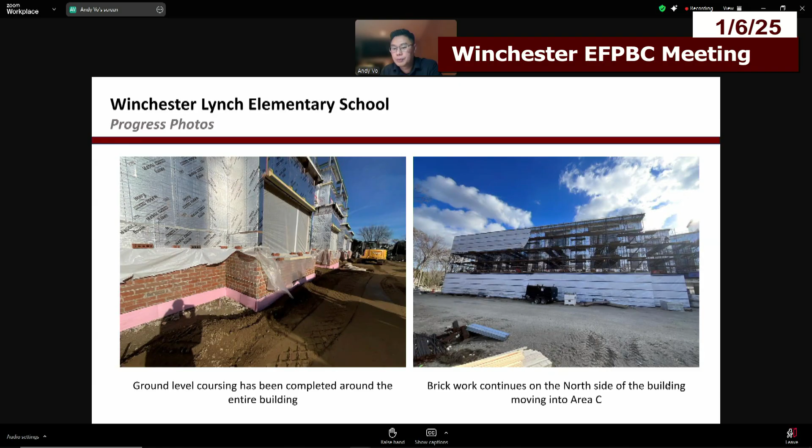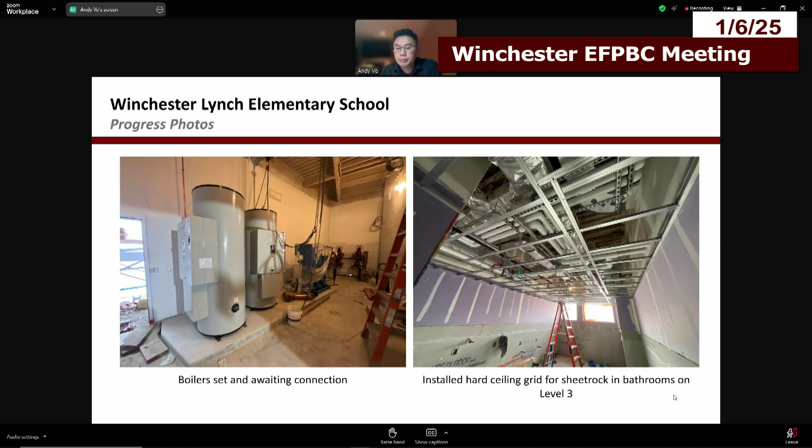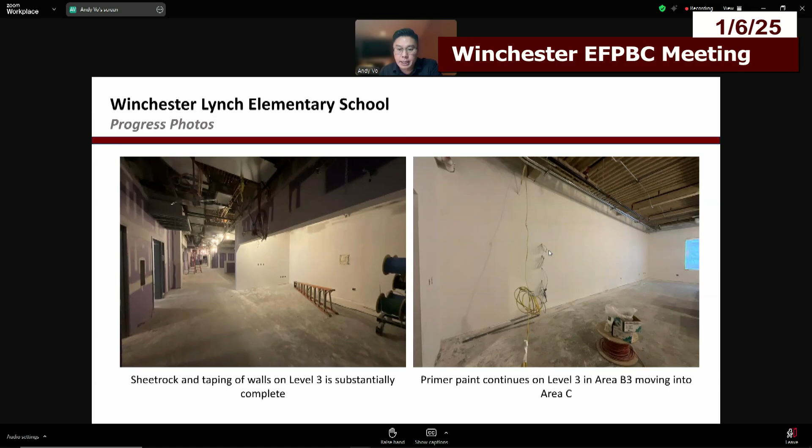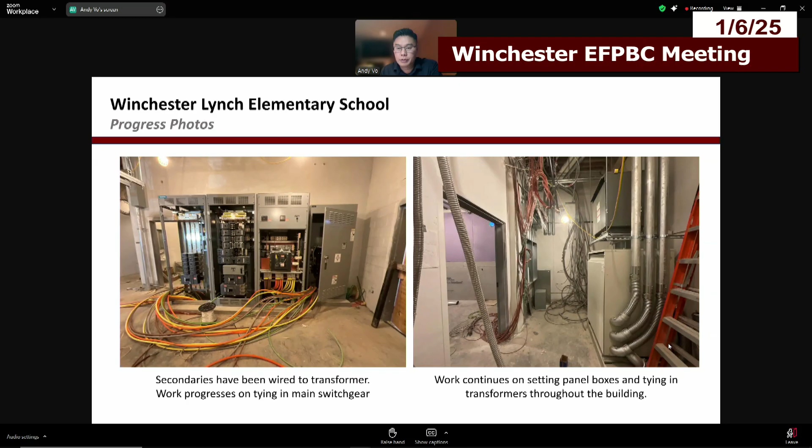The switchgear. So as I mentioned, they already started the secondary, waiting to hear back from Eversource to help us get the permanent power from the pole. Setting panel boxes, progress here with tying into the transformer for the building. The elevator, as I mentioned, is in place. So we're just waiting for permanent power for them to continue on with their work with the balancing of the elevator. Here's more pictures of drywall, and then they're doing the control work, the wiring.

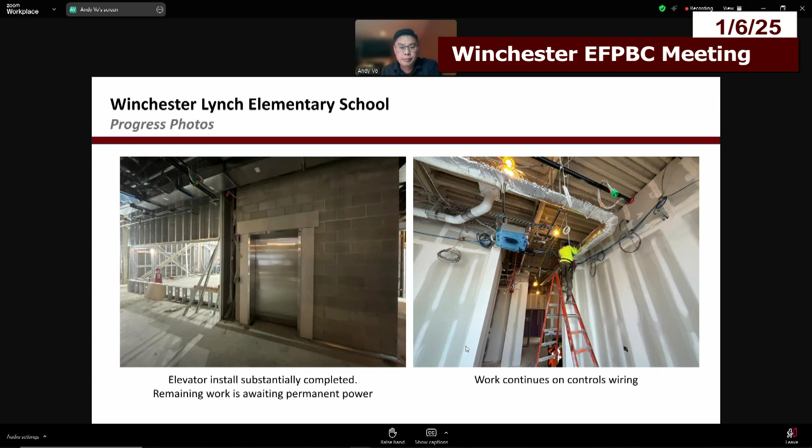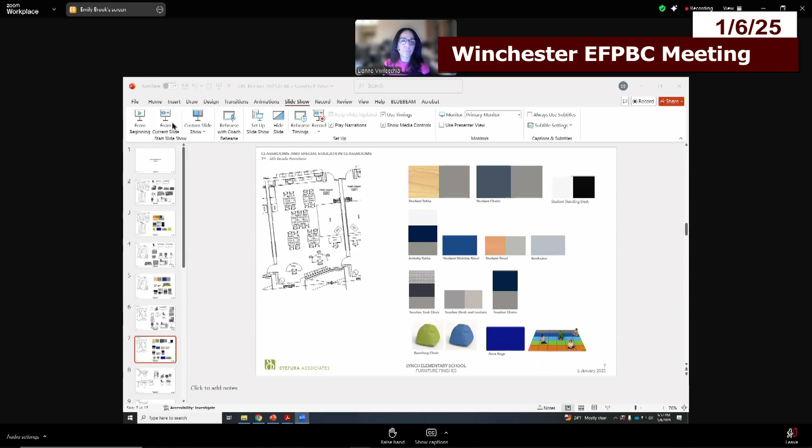The area rugs, yeah, for the younger grades, it's the designated spots, and then I believe grades 3 through 5 have a solid color area rug. Correct.

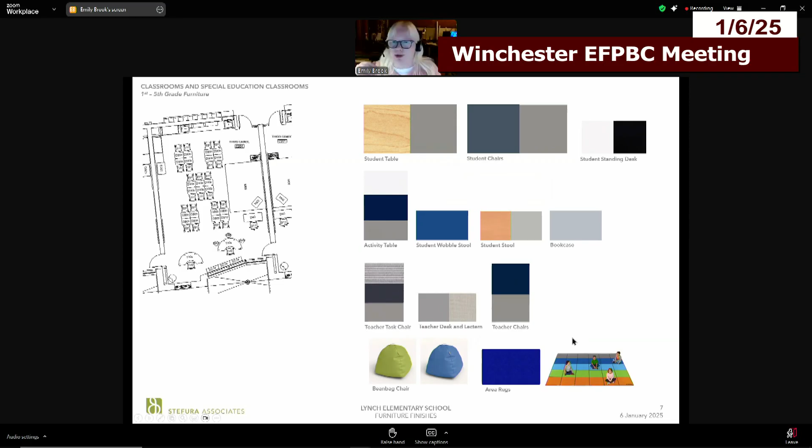Sorry, I couldn't unmute myself. It's okay. Okay. All right.

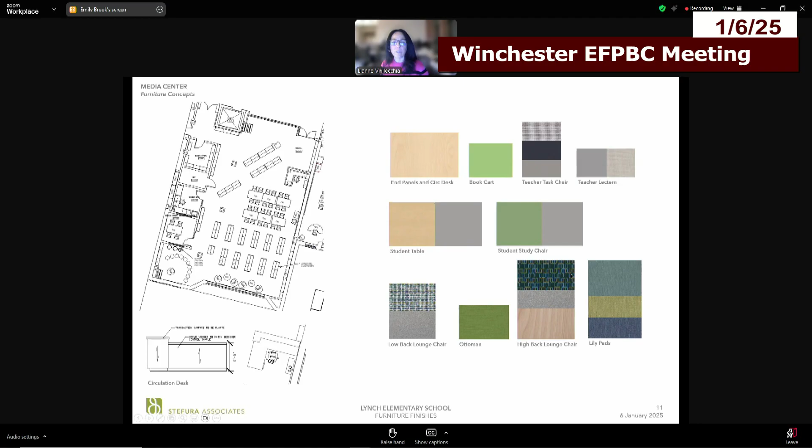And the 2 fabrics you can see for the low back lounge chair, it's a fully upholstered chair with a silver frame. And then the high back chair has that fun geometric pattern. And there's only actually one of those over in the reading area. Okay.

Art and STEAM consist of the heavy duty tables on lockable casters. These are at seated height with the standard student chair or a perch stool. The teacher, in addition to having the typical teacher desk and chair, also has a demo table. And depending on which class it is, a variety of mobile storage units with individual bins that can be pulled out, drying racks, utility storage shelving for the closets, and a mobile marker board.

So in here, the student tables have the epoxy tabletop surface, which is a request. And to add some color into these spaces, we're doing the bright blue metal on the legs of those tables. And then the stool and the student chairs are consistent with general classrooms, as is all the teacher storage and furniture.

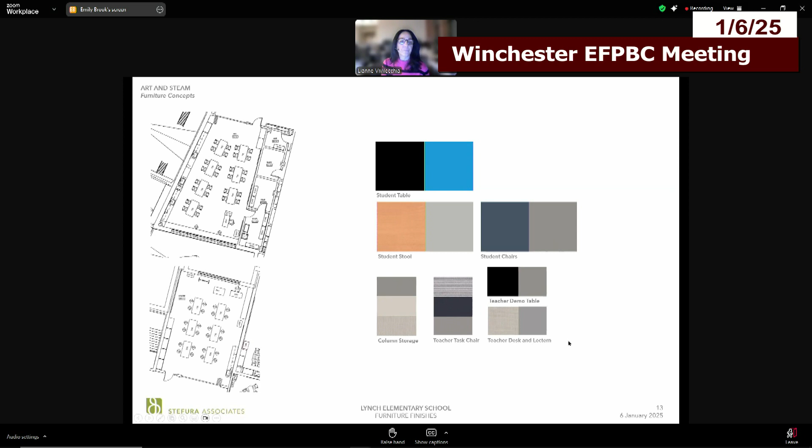For the cafeteria, the layout is a combination of round and elliptical tables. They are all attached to button seats, which was a request from the school. And in addition to those, we have a series of plastic stack chairs. That's the Herman Miller Pronto. There's an amount of these within the seating to meet our ADA requirement. And then the other furniture you see up top is for the kitchen office, so the task chair and storage.

So finishes within the cafeteria: the tables' base is chrome, the button seats are the bright blue, the table surface is a variegated patterned laminate, which is kind of a light gray with light tone finish with a gray edge to it. Stack chair is the gray with the silver frame.

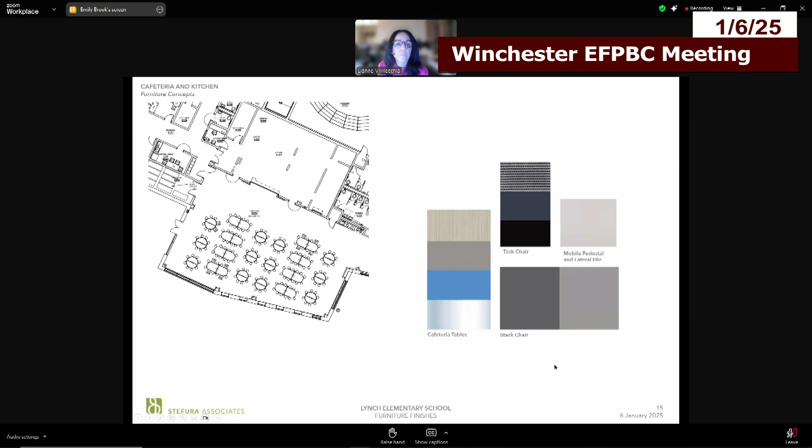And then lastly, the administration offices. We have either L-shaped desks or just single pedestal desks in the offices. All have lockable storage depending on need. There's additional bookcases or file cabinets. The 9-to-5 Neo was the selected task chair for all the administration offices, and the Herman Miller Verus was the selected guest chair in all the offices.

A few wobble stools, excuse me, are used in offices where children come in and meet, guidance spaces like that. In the conference table you see below, the large conference room will have a separate storage credenza, and some of the offices have a separate small meeting table.

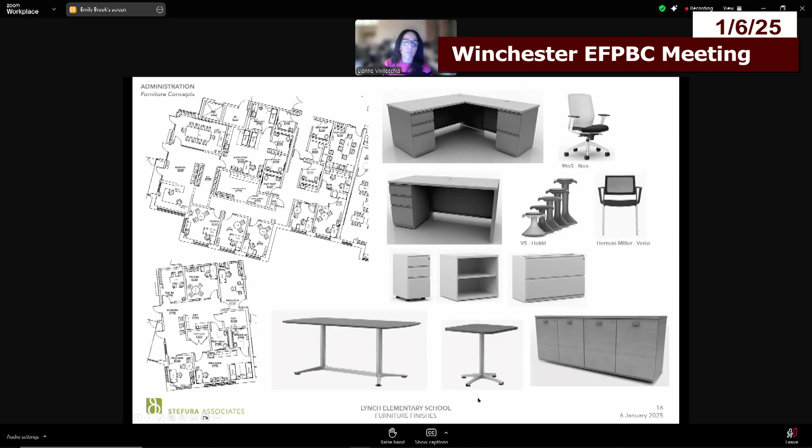And the finishes for the offices, again, keeping the warm maple tone for all of the desk surfaces with light gray storage. Task chair has a mesh back with the blue vinyl upholstered seat and a black frame. And the guest chairs, again, have a mesh back with a blue upholstery for the seat that you see there in the middle. And the wobble stools will be the same blue that's used upstairs. I believe that's the overview. So if there's any questions, that's everything.

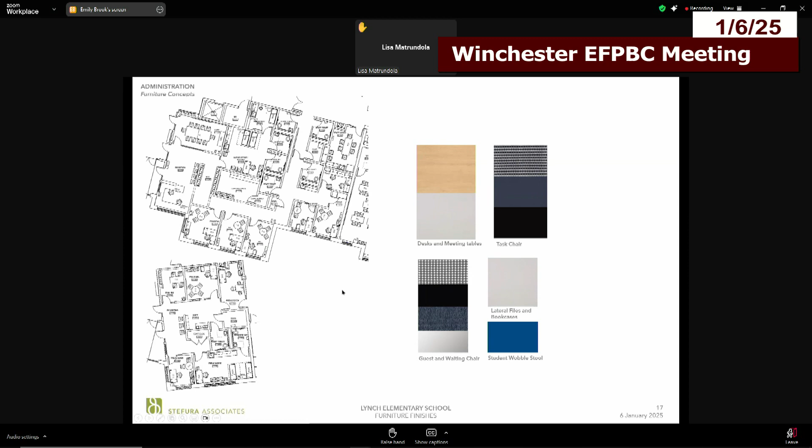All right, Lisa, you're first up. Okay, it looks good. However, I'm kind of concerned about that wavy chair, I don't know the exact name of that chair. The Intellect Wave, yeah. Granted it's cool looking, but I'm concerned about the safety of it. I don't think it's very practical, but I also think, what if a student had, say, some type of spinal thing? I just don't think it's very safe. I know it's cool looking, but I don't think it's very ergonomically correct. That's the only one I'm really concerned about.

Well, this is a student chair that's used very often in a lot of public education, and they did have an opportunity to sit in it and compare it to the four-legged chairs. We are using it in the pre-K and K grades. It is just pre-K. Sorry, yeah, it is stable, and I think what they like about it is that it has a little bit more flex and movement to it because of the cantilever. So if kids are fidgety, there's a little play in it. It's really minimal movement, just a little bit.

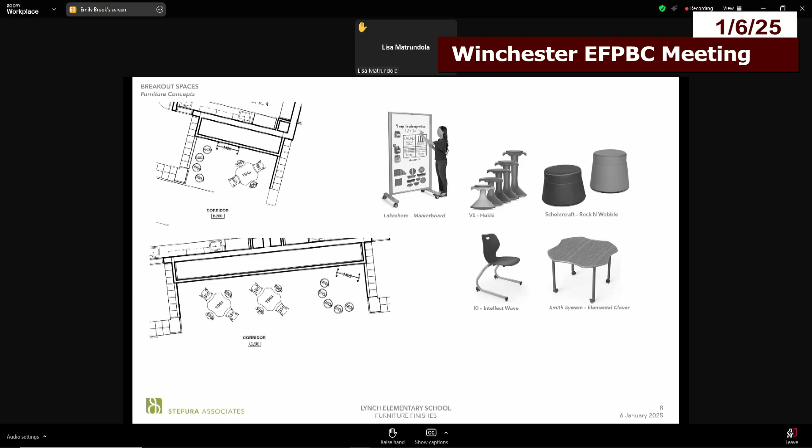You're not wrong. Yeah, it's tough in a photo sometimes. I think of a young child that possibly could have scoliosis at that age. You know what I'm saying? And that certainly wouldn't be the chair that I would recommend. I don't know, I'm just thinking out of the box. So, okay. But the rest of it looks okay.

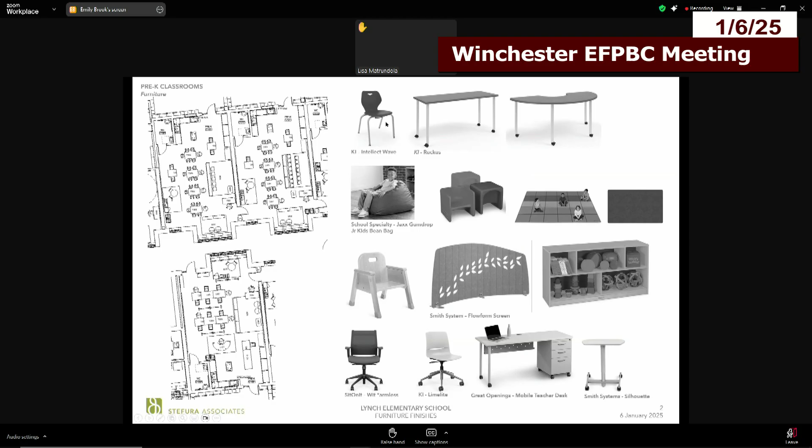Okay. I really don't know a lot about scoliosis, but it is the exact same seat frame as the 4-leg version. Just the legs are different. I don't know if that helps. I don't know what the needs for something like scoliosis would be. Yeah, I think it's more the back and the support and just the chair being more straight like that. Yeah, the seat actually is the same. It's just the frame. Okay.

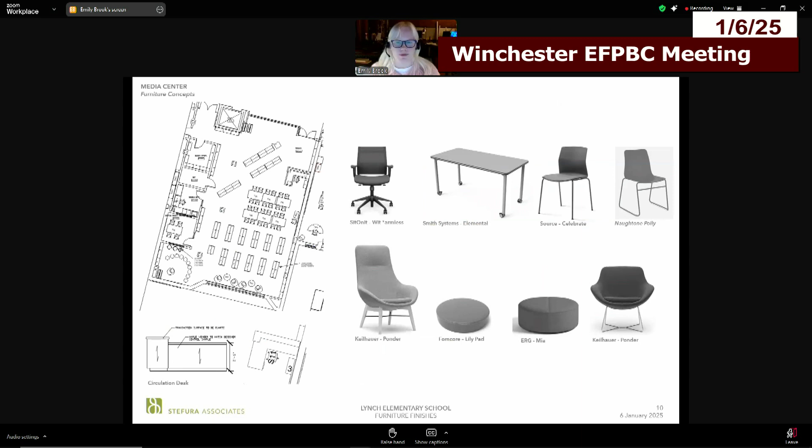Okay, it's nice though. That was my only concern with it. Oh, thank you. That's a good concern. Chris? Yeah, I had several questions. Are the stools in the STEM lab stackable? Yes. It's Rondo, right there. Is it Rondo? Yes, they are stackable.

Okay. And in the cafeteria, I think we're seeing tonight the two different table types. Sorry, this looks different than what we saw in Dropbox just 2 weeks ago, Jay. I think we're in the right ballpark. If I counted them, we have seats for 192 students, which seems about right, given how we break up the lunch day. But can somebody just kind of speak to this approach about having two different table types in the space?

We had updated the layout to accommodate a higher seat count, and with the need for more seats, we couldn't manage it with the round tables, so we opted for some of the ellipse tables too. It's a lot easier to get more seats in with that shape. So we tried to go for a good mix so the students had options.

That makes sense. I actually like it better this way. I think it gives kids and staff more options. Although this tends to be maybe a bigger issue at middle school where kids start having a choice about where they sit and who they sit with. But student choice is not insignificant as kids get more and more agency in our school buildings. But I like this approach.

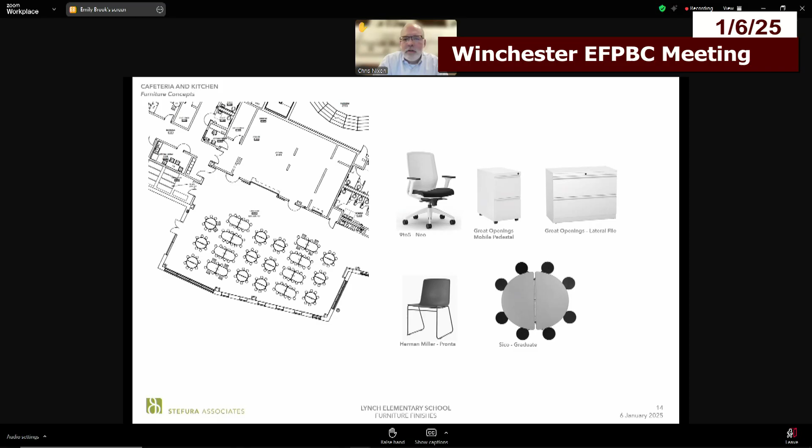Leanne, can you go to one of your earlier plans where you showed the student desk? I think it's your D90, if I have that right. You had an image of it. Can you just confirm for us that we're using the same desk, maybe with the exception of preschool?

The distinction between an A and a B and a C is just how the vendor is actually setting the height of the legs. So if we have changes in enrollment, we can shorten or lengthen these legs, move those tables up and down the building, right? That's correct. Yes. Okay. Yeah, you can't move them class to class, but someone could flip them over and adjust them. Right. Okay, thank you. Sure. Any other questions? Anyone?

Sorry, I just had a question about the process of this presentation and what's next. Just as a curiosity, what's next in the process? Assuming the team has been vetting this out.

Well, this has been progressing. With the holidays, this has kind of lagged a little bit. It's gone back and forth, some changes were made. Chris went through and counted everything, which was a great help. This will come up a little bit later, but we want to give it the week to digest and try to have a vote on the 13th just to address the FF&E package. I don't think it's fair to ask everyone to vote on it tonight without really getting to look at this. But right now, I think we want to get any questions to the team.

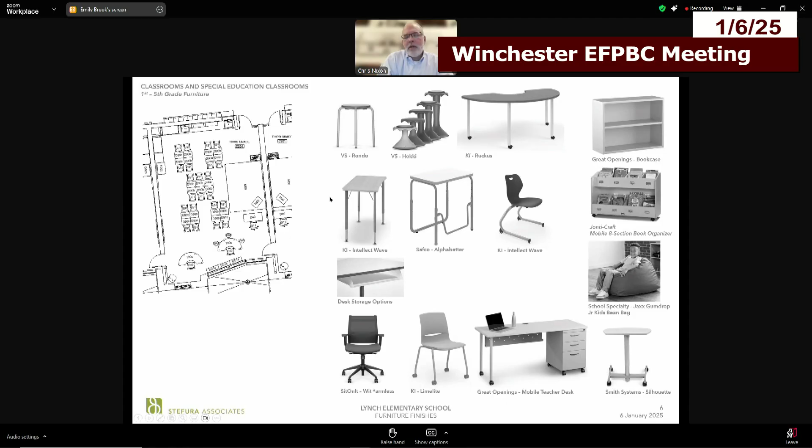Can we ask Jay if Chris Sharkey can just take a moment to comment? Are there any other open items? There are some items I think that are not fully spec'd yet. We maybe are carrying some allowances, like outdoor classroom comes to mind. Just so the committee understands where we have areas that aren't fully spec'd out yet, or if there are any programming meetings yet to be had with the district.

What's our approach there? Leanne, would you like me to jump to the pricing? Yeah, why don't we? Should we share it, Chris? Yeah, that would be great. Okay. And then after you see this, I'll follow up with some of those open items, and then we can talk next steps. Can you zoom in a little bit more? Tell me when you're ready for scrolling.

Okay, thanks. So just so everyone understands... Wait, can I pause real quick? Sorry, go ahead. No, sorry, there was a hand. Emily has a question. I just don't want to let her get too far. Emily, you want to ask a question? Yeah, sorry if this was mentioned.

What's the lead time for all this furniture? Do we need to set a deadline to say, let's release this by this date to make sure we don't get ourselves in trouble? Yes, we do. We'll talk about that. Good point. We'll circle back to that after this, if that's okay. I just wanted to make sure the 13th wasn't going to be bad, or if we could establish a date to make that decision by, that'd be great. Thanks, Emily, I appreciate that.

Okay, so the process and where we are right now to date: we've had our series of meetings, we had all our selections, we specified everything based on those meetings, and we solicited quotes from various purchasing contracts, which we had talked to the town about ahead of time. And what you see is a result of all of that. This pricing summary is separated into two sections, the first being the furniture and the second being the equipment.

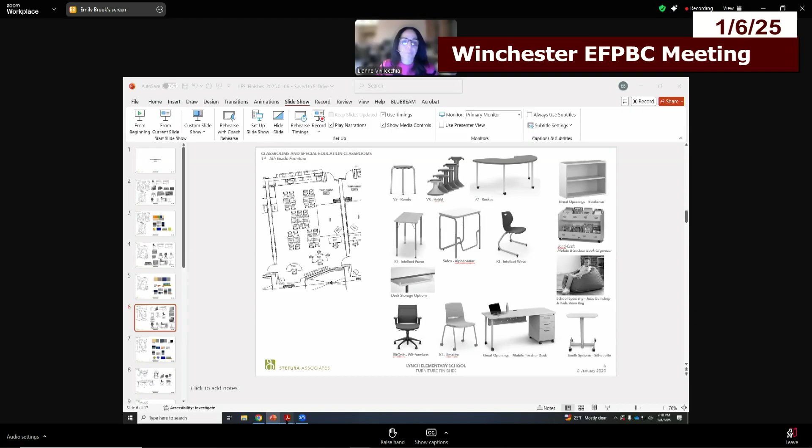So getting back to it, really at this point, we feel comfortable with the furniture as it is. And so the next steps would be to get the committee's approval to go forward with purchasing. When that happens, we'll prepare award notices and work with Meg to get the purchase orders issued. I will say there's definitely more of a priority to push the furniture through as soon as possible. We definitely want to get the purchase orders processed this month to meet that end of June installation date. You really don't know. Lead times vary. Equipment is not as long a lead time as the furniture items are. So if that needs to happen, we can entertain that for sure.

But we would want to stress that we really do need to get this furniture wrapped up as soon as everybody's comfortable, for sure. As Leanne was saying, lead times are not guarantees, right? So we want to get the POs up and going as fast as we can. So if we could shoot for something on the 13th at the latest, that would make me feel okay. And then we'll be all over Meg.

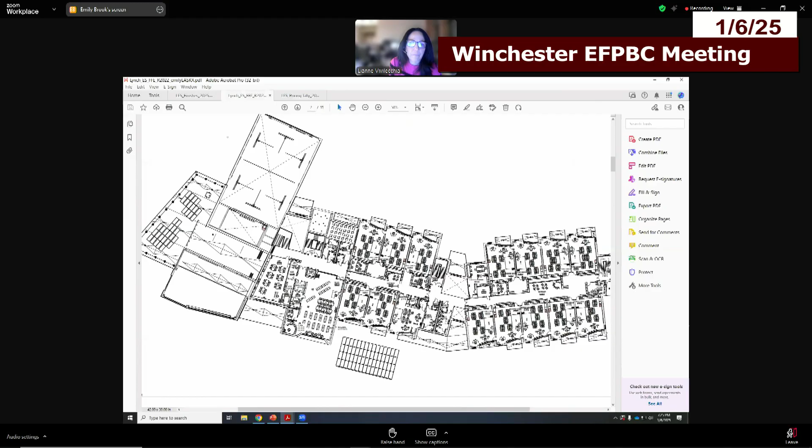But there are other student desks and chairs scattered in support spaces around the building. So 540 is what you would get if you literally had 20 students in every classroom. I mean, like here, for example, the breakouts, right? We didn't talk about the special education spaces, right?

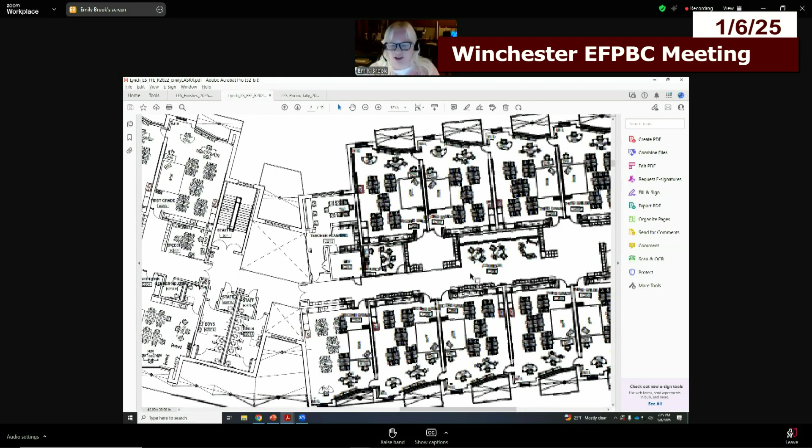So those have some too, and the corridor breakouts have a few. No desks, but the corridor breakouts have chairs. Chairs, yeah. So there are definitely some support spaces that have them as well.

So my point was just that we don't feel like we're skimping on the furniture. We've gone beyond certainly the design enrollment. And a lot of this furniture can be moved vertically in the building if need be.

Any other questions for the team? Okay, I think we'll move on. Like I said, we'll try to meet on the 13th and get a vote on this equipment package. Okay, thank you. That would be great. Thanks, Jay. All right, move on to the manager's letter, Meg.

Sure. So, I don't have it handy. I'll try to pull it up. Just give me a moment. Okay, great.

So there are quite a few payment authorizations for the Lynch, and I can go through them. Brait Builders application number 13 for $4,192,448.93. Hills invoice for $78,608.73. Tappé's monthly invoice for $97,509.73. Two Triumph invoices, December and January, just happened to hit the time, both for